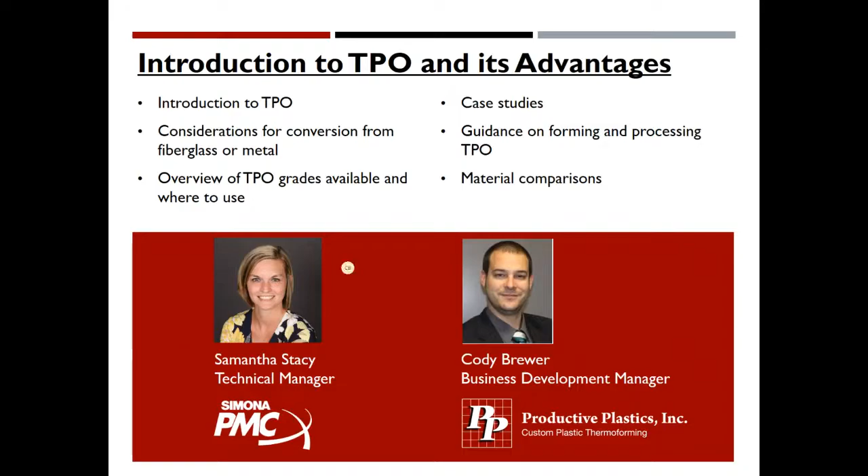So Productive Plastics, we are a heavy gauge plastic thermoformer. We were founded in 1955, so we're coming up on 70 years of operation. We do all vacuum forming and pressure forming, with in-house paint facilities. A lot of times when using pressure forming, we utilize textured molds to give a really good desired finished product.

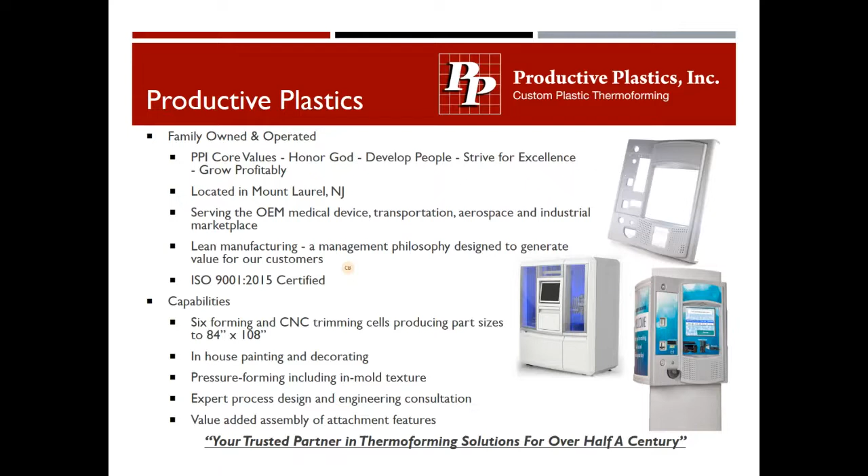Thanks, Cody. I'm Samantha Stacy, the technical manager at SIMONA PMC. I've been with the company since about 2015. I came in as a process engineer, spent some time as quality manager, and now I'm in charge of technical, so R&D, giving presentations like this, and helping our customers and OEMs pick out materials.

A little bit about SIMONA PMC, we're a custom sheet extruder based in Findlay, Ohio, about 45 minutes south of Toledo. We focus on the thermoforming market, so everything we make is a flat sheet that ends up being thermoformed into another part. We have very few pieces that stay flat.

We were previously a part of Romark, which some of you might be familiar with. We grew out of some excess capacity with Romark back in 2003, with heavy growth in 2016. Romark moved out and built a new building in the same industrial park as us, and we were acquired separately by SIMONA in 2018. It's been a good purchase for us.

We're among other sheet extruders, with 3 lines here in Findlay. They're all coex, so all multi-layer sheet extrusion, with capabilities up to 116 inches wide and up to 400 thousandths thick. The thinnest we go, which I'm getting asked about more and more, is about 033 on TPO. We have different capabilities like corona treatment and film lamination, plus a small R&D line for a lot of our innovation work, prototyping, and small sheet runs.

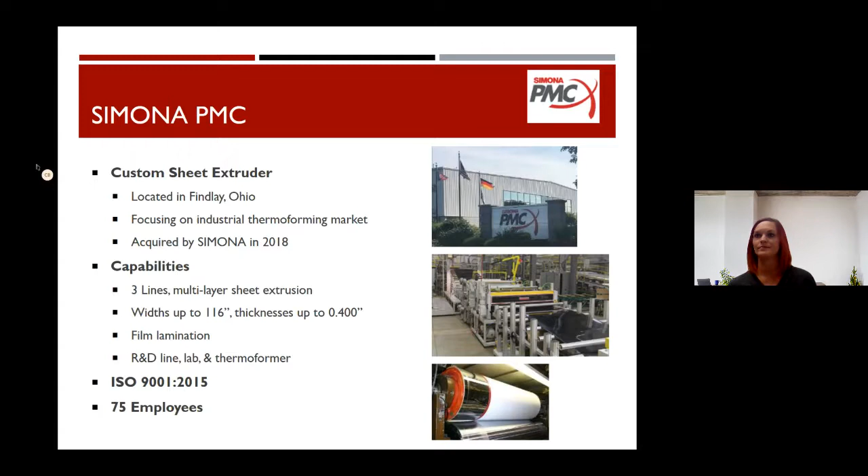Sorry. Cody, you might have to help me out. Thank you, sorry guys, it's my first webinar, so I am trying to figure it out still.

So why TPO? What is it? TPO is thermoplastic polyolefin, which is sort of a generic name. It's a blend of polypropylene and polyethylene. There's some elastomer in there for impact, and then some minerals, talc, and other additives for UV resistance, sometimes FR, and other properties.

It's processed a variety of ways - obviously extrusion, which is what we do here in Findlay, but it's also blow molded and injection molded depending on the grade. You see a lot of TPO in automotive, and a lot of that's injection molded. Most of your bumpers are TPO.

So why choose it? There are 4 reasons that we see TPO being chosen over other plastic materials, as well as over fiberglass or metal. The first, and one of the major selling points I think, is the cold temperature impact resistance - it's ductile down to -30. We see a lot of parts used outdoors in the winter being moved to TPO for that impact resistance; it's going to dent before it cracks. Other benefits include low thermal expansion, so parts that see a bunch of temperature swings, pretty good chemical resistance, and almost all of our grades are weatherable.

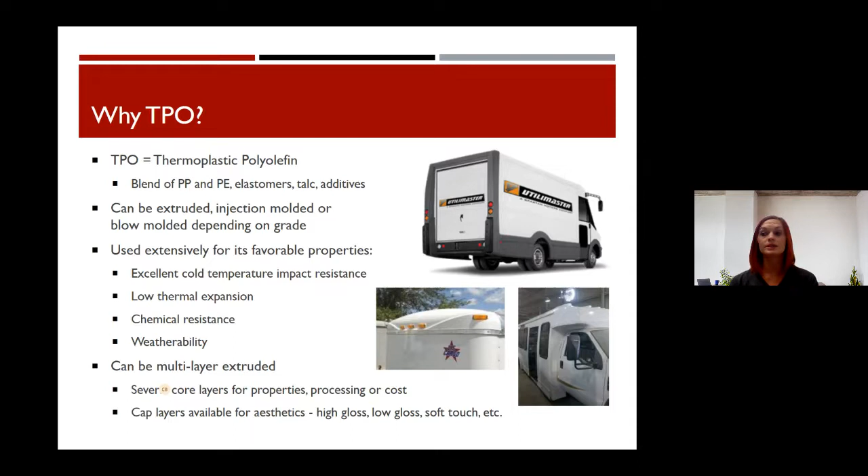So it holds up outside, inside, wherever it's being used. It can be multi-layer extruded. Like I said, all of our lines in Findlay are coex. So we see a lot of people choosing the core layers for properties, and then you add that cap layer.

So just kind of diving into some of those benefits. The first one, like I said, this is a major selling point for TPO, cold temperature impact.

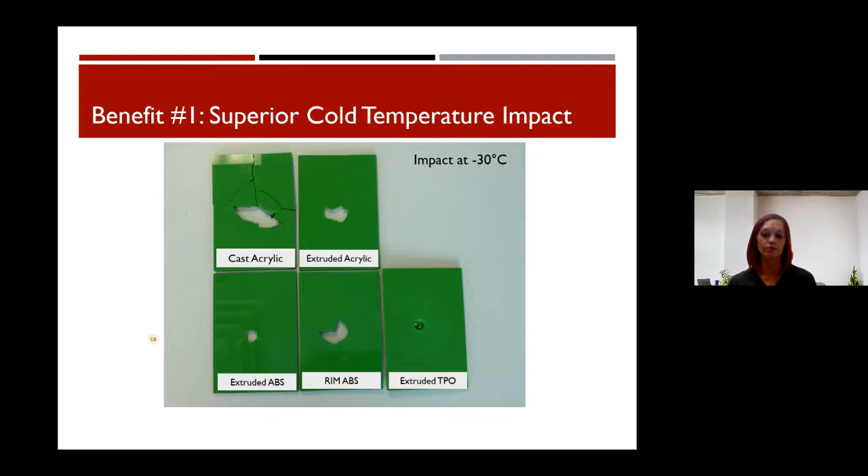You can see these samples. They were put down in a freezer at -30°C. You've got 2 different types of acrylic and then 2 different types of ABS compared to the TPO. You can see they've all cracked except for the TPO. It's definitely denting, but it's not full failure. So that's one of the major benefits.

The second one, which has been more popular lately, is the Low CLTE. This is one of the major benefits for it over an HDPE product. So CLTE, what is it? It's coefficient of linear thermal expansion. So how much the part in total is moving from -30°C to 80°C. So not just cold, but hot temperatures.

This is pretty important when you're looking at larger parts. Parts that have a long span, like you can see in the photo there, those bottom skirts for the U-Haul were moved to TPO because of what's happening in that top picture. They're warping in between the connection points. There's a ton of rivets down the side of that thing, and basically there's no room for the expansion and contraction of an HDPE. And so it's got to go somewhere, and it makes this bacon shape.

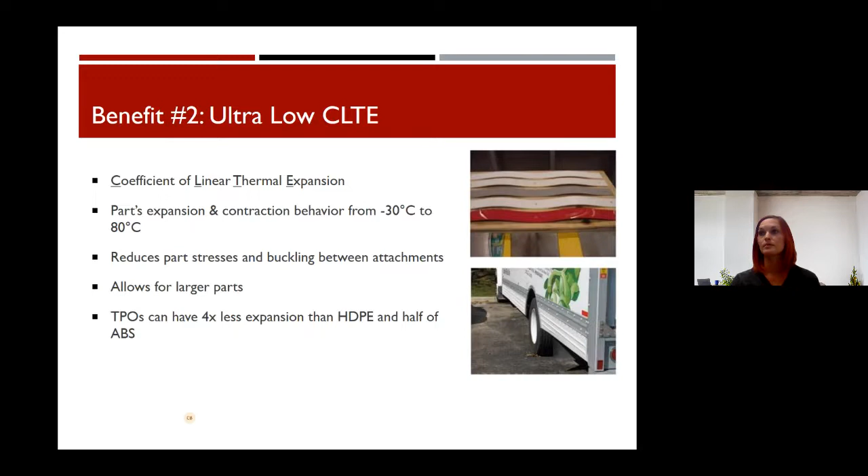So overall, TPO has 4 times less expansion than the high density polyethylene. So we see that a lot in flat panels or big kind of shoebox lid shapes. It has half that of ABS. So even if ABS is having a little bit of an issue, TPO is going to move less than that as well. And this is just some quick math.

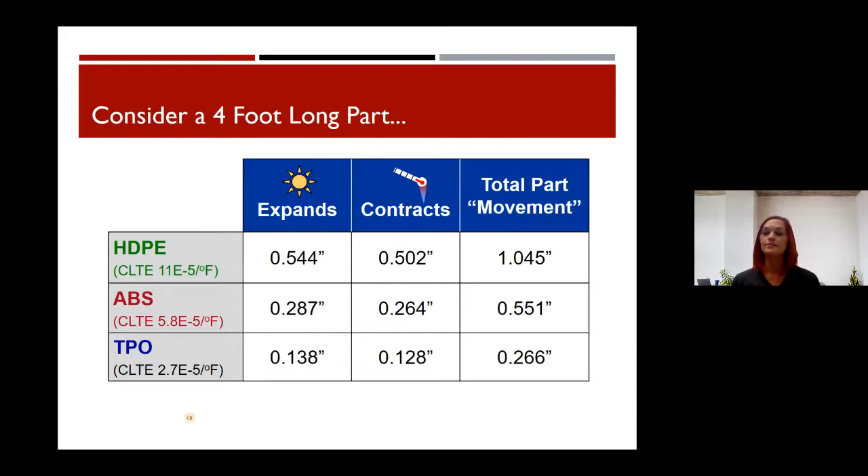If you have a 4-foot long, let's say, panel, and it's in HDPE, your total contraction is over 1/2 inch either direction. So you have to account for over 1 inch of movement total. With ABS, you have a little over 1/2 inch total, and then TPO is just a little bit over 1/4 of an inch. So that's pretty doable to account for.

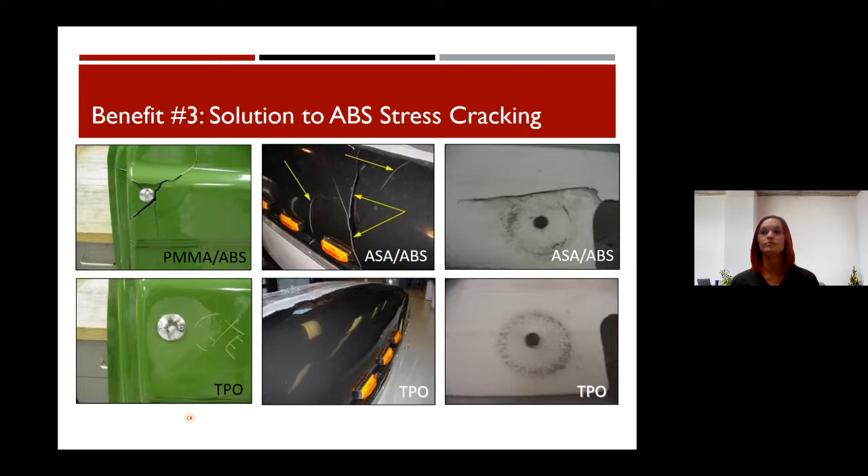This is kind of a lot on the slide, but basically really good chemical resistance. The only thing that's really going to bother TPO is something oily. Think a diesel, think a kerosene, something of that nature. And only if it's really soaked in it, it just makes that rubber content, the elastomer in there, swell up a little. Not really too much of a property issue, more of a discoloration type of issue. But for the most part, pretty good in chemical resistance.

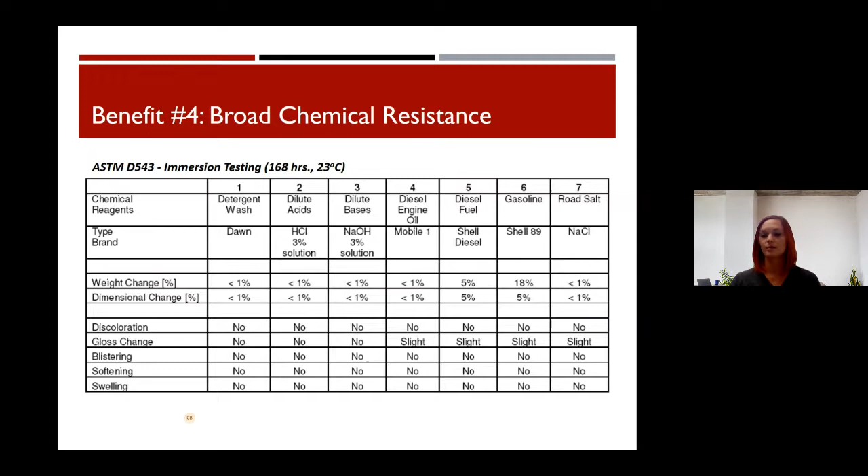Again, this is a lot to look at, but weatherability, almost all of our grades have weatherability already, they have UV in them. Even in bright colors, which are traditionally hard to weather, your reds, oranges, yellows, those always have a little bit of an issue weathering no matter how much UV is in them. TPO, particularly the high gloss caps, perform very well in those outdoor service environments.

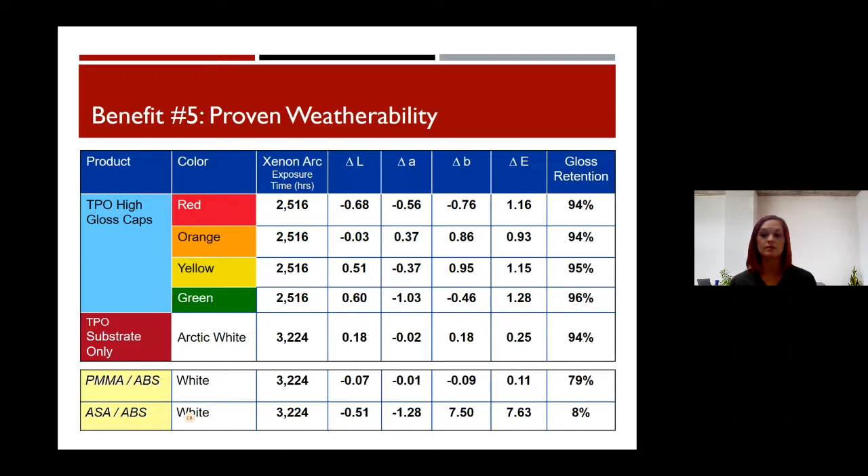Just a quick slide comparing it to a gel coat fiberglass. We looked at it in an orange color as well as a dark red. Typically, we use the automotive standards, indoor and outdoor SAE for accelerated weathering. Rule of thumb's about 1,000 hours is 1 year of South Florida exposure. We looked at the fiberglass against the high gloss TPOs, and you can see the fiberglass is good to a point. About 1,000 hours, you get a 4 delta E. In that bright of an orange, you're going to start to be able to visually see differences around 3 delta E. So it's good for about a year, but after that, it dramatically starts to fail.

You can see we did the same colors in orange and red in high gloss TPO, and they're still performing very well even after 2,000 hours, which is 2 years of South Florida exposure. And that's with water as well as heat.

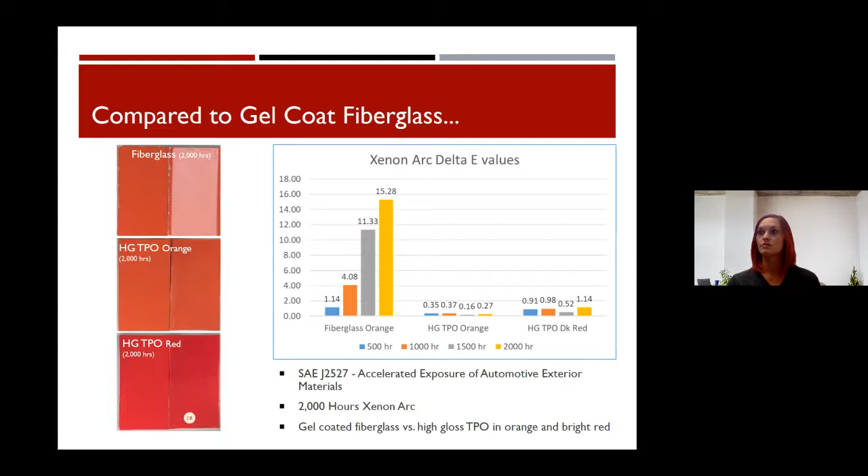On the why TPO question, one of the biggest topics I'm asked to talk about with our OEMs and thermoformers is conversion. A lot of people are looking at conversion out of fiberglass right now, just due to availability, but also out of metal. People who've never looked at this type of conversion before are more interested now than ever, so this slide came out of that popular topic.

One of the first things we talk about is lightweighting, especially with electric vehicles becoming popular. People are starting to look at how they can take weight out of the finished product, especially vehicles, also boats. A typical thermoformed TPO part is about 6 times lighter than metal, so it definitely wins there, and it's also about 30 to 40% lighter than the same part in fiberglass. That's been a big deal.

Fiberglass has always been a very labor-intensive process. You can make the same thermoform part with a lot less labor going into it. It's also an environmental control issue - anybody who's been to a fiberglass plant has smelled it a mile away. There's actually permitting required for that type of resin once you get to a certain amount. Not true with thermoplastics.

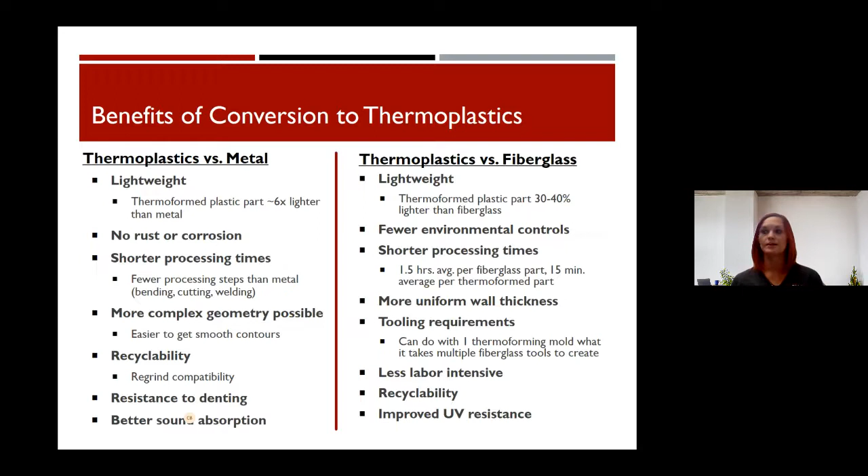And then recyclability - we get asked a lot what we're doing to recycle material and utilize recycled materials, which is kind of a funny question because we've always depended on recycled materials. There's about 20 to 30% recycled content usually coming back from the former to go into the sheet, which isn't necessarily true for fiberglass or metal.

This slide can be pretty quick - these are just some quick examples. A picture is worth 1,000 words, they say, so these are just some conversions to plastics from metal or fiberglass that we've seen in the past.

You can see that UPS truck, the gray pieces at the bottom. Again, that's a good example where TPO is a good option because it's a long flat panel, attached in multiple places along that truck, really to prevent it from warping.

The front bumper, that Mack bumper on the bottom left, that gray part is becoming TPO. We've also seen a lot of these trailer end caps, the white and black ones in the bottom right corner - again, that's for cracking, denting. Some of them were metal, they'd corrode, crack, and the paint would fade. Switching them to ABS or ASA type product solved some of it, but then you've got stress cracking, cold temperature cracking. Actually, I think that lower right one looks like it might have a little dent in it because it was metal - so a lot of those are moving to the high gloss TPOs.

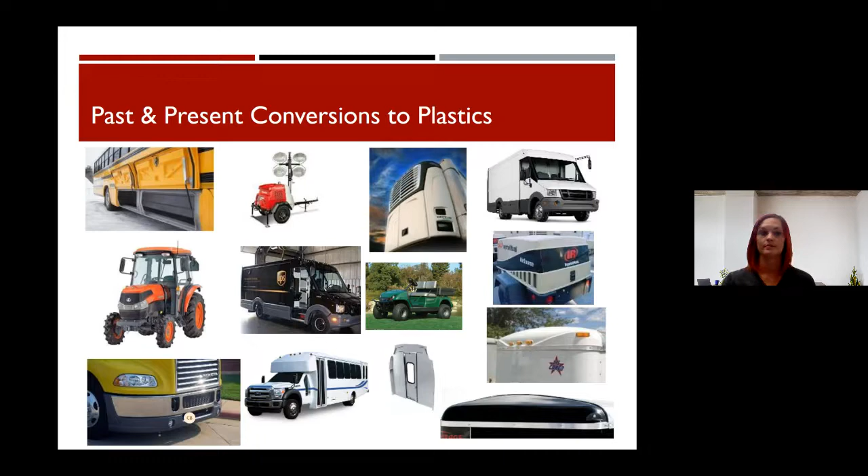So moving out of the why TPO and into what are your options. PMC extrudes 13 grades of TPO regularly, so we stock 13 core grades. We have access to many more, so you have a lot of options. It can be a little overwhelming, especially coming from metal or fiberglass and not knowing what the options are.

So how I usually present this, I like to think of it as a menu. Based on what properties you're looking for, here's all of our grades. Then as I learn more about the application, it allows me to remove some of these choices. It narrows the field down, so it's not quite so overwhelming.

So when we're talking about TPO, there's two main characteristics on the menu. Gloss is the big one. Do you want high gloss, low gloss, or don't you care? About half the options are high gloss, half are low gloss. We see a lot of low gloss in interiors, heavy truck likes low gloss, a lot of high gloss in exterior panels and parts, think vehicles, tractors. They want it to look glossy and shiny on the lot.

The other factor we think about is melt strength, which is kind of interesting. Melt strength is when TPO starts to sag in your thermoformer. You start to form this bag. It's not like ABS where it's slowly melting - once it starts to sag, it sags. So how well do you need that to hold together?

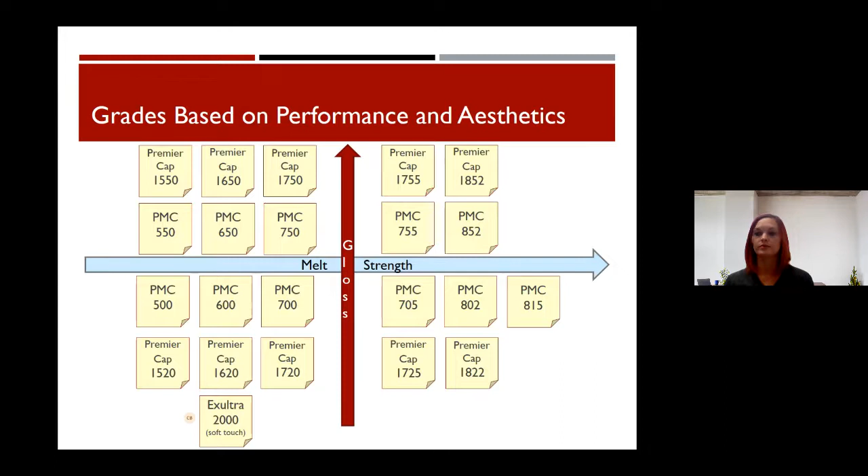Why is that important? It kind of depends on your tool. How deep is it, how complex? The more complex a part, you might need a little melt strength to help with that thermoforming. We can go all the way up to a high stiffness material if that's a concern. So we talk about aesthetics and how hard this part is going to be to form, how many features. Those are kind of how I see our world of TPOs.

So just starting off, the standard TPO series - 500, 600, and 700 series for PMC. 500 is our utility grade, it's got high regrind content. It's not going to have a lot of melt strength, but it's great for utility parts, for something simple, small. 600 and 700 series start to get into our standard and high melt strengths - that's that melt strength factor again.

Any of these can be textured, they can be smooth. We have a set of stock textures, and they can take a texture in a tool. We see them a lot as core grades as well, so they could be co-extruded. We can put a high gloss cap over it, a low gloss cap, whatever properties we're looking for - regrind compatible, so you can kind of see how the flex mod moves.

Your PMC 600 is standard, looking at around 275,000 PSI flex mod, HDT around 210. PMC 700 is probably one of the most popular grades - that's the high melt strength. You get a couple degrees on HDT, but you really gain about 25,000 PSI on flex mod.

And then PMC 705, we call it our ultra high melt strength product - 310,000 PSI on the flex mod. It's really for those parts that need a little more stiffness, a little more strength against sag, need to take a little bit more of a deep draw or some features.

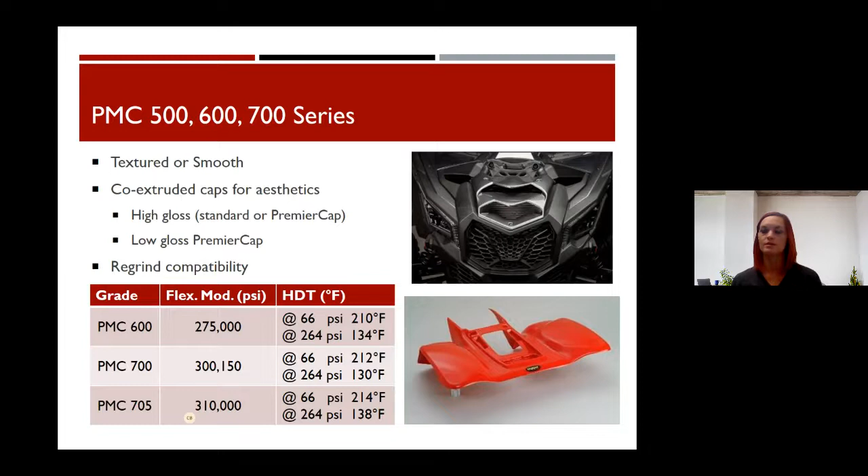Like I said, all of those can be extruded alone, or for properties we can extrude a cap over them. Our Premier cap line is relatively new. We obviously have a standard high gloss cap, but we developed the Premier cap - it's low, mid, or high gloss options.

It came about to address a field whitening phenomenon that was happening with TPOs. You can see that light tower, the green there - it looks like a weathering failure. It looks whitened from being outside, it's not the bright green anymore. It seemed to only be happening after thermoforming, and like I said, it looks like a weathering failure.

But we embarked on a long project to figure out what it was because it didn't make sense. We had UV in there, these things were weatherable, they were using color fast pigments. We learned a lot and found out the root cause wasn't really truly weathering. The properties were there - it was just a surface phenomenon that happened post-forming. It really was just on the surface where some of the mineral fillers were being locally enhanced, where there were just more of them.

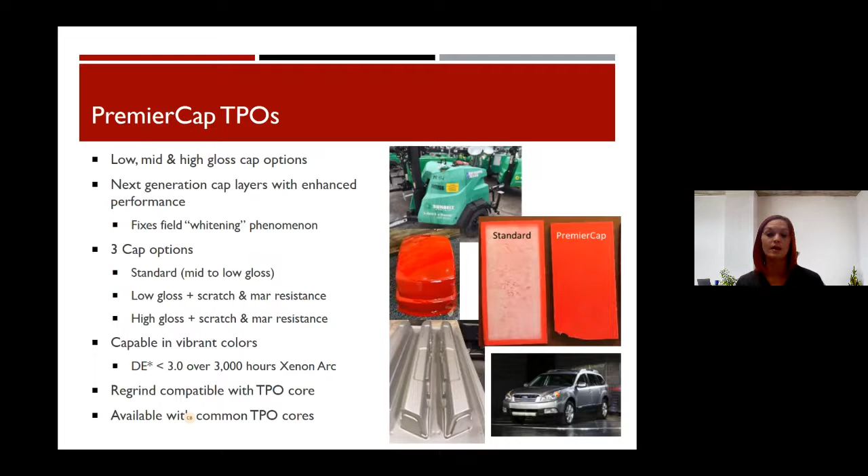So just some of the testing that we went through as we were working on the scratch and mar. Premier cap 1755, so it's the high gloss product. We have a small Gardner scratch. So when you think of scratch stylus, it's a stylus, so it's a point contact. Think your fingernail, I'm going to scratch something with my fingernail. Same kind of thing, just a little more controlled.

You can see off to the far left there is an acrylic. That's kind of the gold standard for scratch, as well as for mar. We tested the Premier Cap as well as standard high gloss TPO, and the Premier Cap performed nearly as good as the acrylic. So we were pretty happy with that.

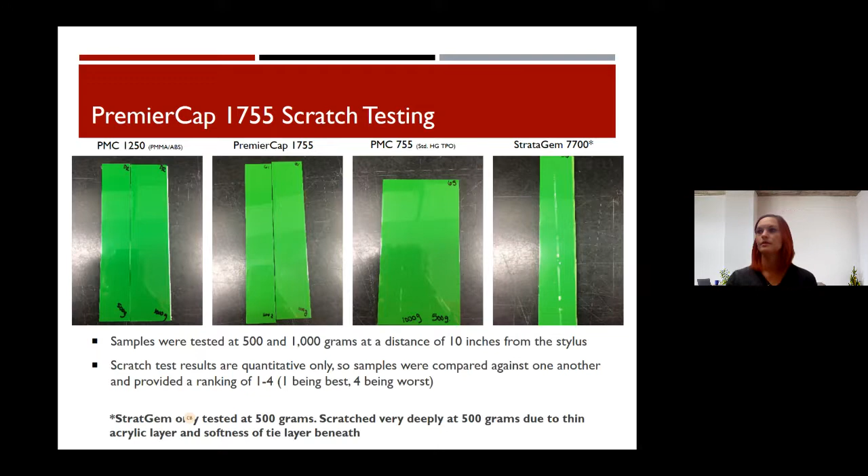Mar, it's basically more of a rub than a point. So it's a sort of an abrasion. And it's 5 strokes with a specific type of cloth, and you measure gloss before and after and compare.

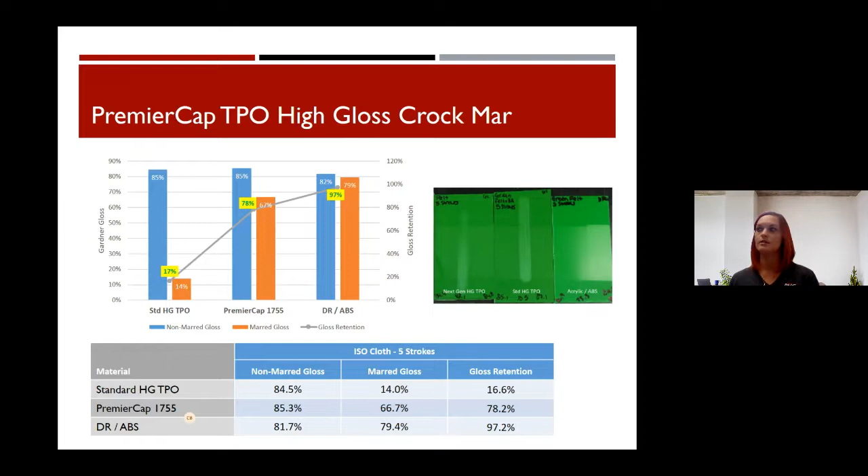So again, the acrylic is the gold standard for mar. You can barely see off to the right that it was ever even rubbed. The standard high gloss, there's a big white streak down the middle. It's pretty obvious, but you can see from the data that the Premier Cap performed very well. Still not quite up to acrylic, but significantly better as far as amount of gloss lost compared to standard high gloss.

So one of the major reasons a lot of people count TPO out is stiffness. Be it an arm on a console that's maybe a little too floppy feeling, or something that has to be close to a part that gets hot. We see people say, no, I don't want to talk about TPO for that because of that reason.

There are grades out there for that. They're becoming a little more popular now. We have two here at PMC. We have PMC 802, so that's a high mineral filled TPO. It takes your flex mod up to 570,000 PSI. Remember your high melt strength - the highest melt strength grade before getting into these high stiffness grades was 310,000 PSI.

It takes the HDT up to around 240. I've seen it be used near parts that get hotter just for shorter amounts of time. It's not like it's going to melt at 240, it just starts to deform. So we've been talking about that one a lot. The benefit with PMC 802 is aesthetics, so it can be used in parts you're going to have to look at.

It forms pretty well. PMC 815, if you need a little bit more heat, is the next level up. It's a glass filled TPO, short glass filled, and it gets your HDT up to 300 degrees. So we see a lot of fan shrouds in 815. It's close to some engine components, parts that get hot. It's also really stiff to the feel - 580,000 PSI on the flex mod.

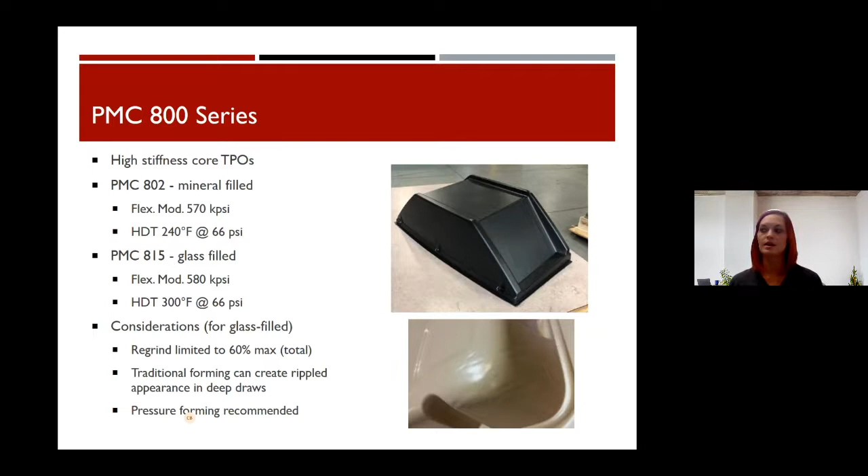So we, PMC, a lot of our innovation is focused on what our customers' feedback is on our current products and where we're missing the mark.

So the Premier Cap came out of the field whitening issue. Complaints about stiffness, we start to look at high stiffness grades. One of the major drawbacks of a TPO is that it's difficult to bond, difficult to paint. Low surface energy means nothing wants to stick to it. So coming out of that, our newest product line is Ontex.

It's our Ontex 8000 series, and it solved that problem. It's directly bondable, directly paintable. It's a film type of lamination process, and it allows for direct bonding and direct painting with no surface treatment. Actually, if you sand it, that would be negative because it removes that capability.

So you can use common adhesive. One of the major complaints - you can glue TPO, you can paint it, it just takes a lot of effort. You're putting a lot of surface treatment, there's primers, the adhesives are expensive. You could use regular ABS adhesives. We have people painting it. So there's none of that extra work.

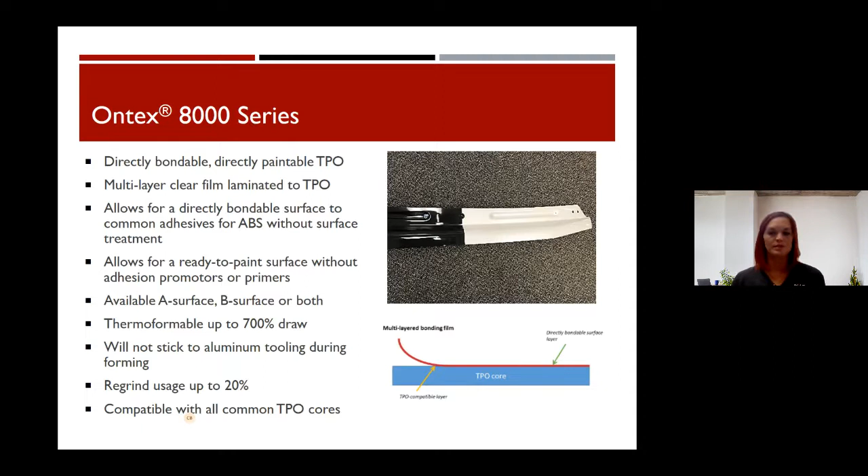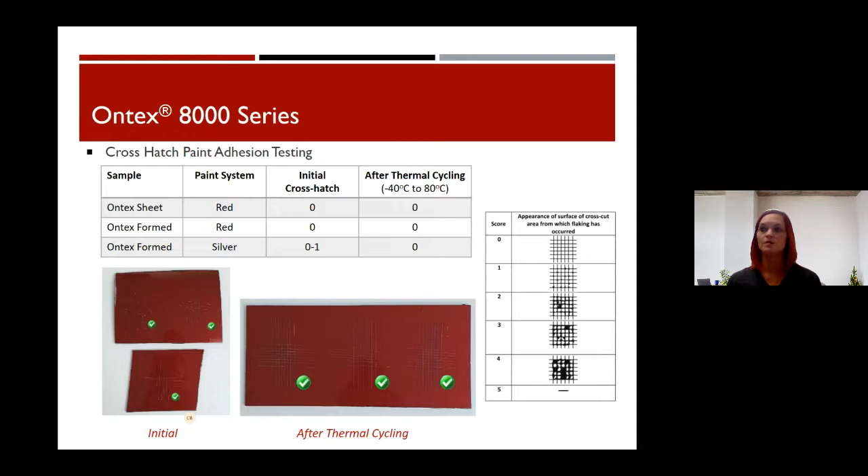We did do some testing, had some testing done with some outside suppliers just to make sure it was passing muster. One of the automotive grade tests for paint adhesion is this crosshatch test. We looked at red, we looked at a silver, and you can see even after thermal cycling fully from -40 to 80 C, it performed very, very well. So we got good adhesion on the paint. And then we also did a lap shear test for bond strength, where we made these little plaques. We bonded ABS as a control, as well as the TPO with Ontex.

We kind of took a poll of some of our main thermoforming customers and asked, what do you use to glue ABS? What do you use to glue ABS to things? And a popular one is the MA300 from Plexus. So that's what we used. You can see the Ontex performed just as well as the ABS, so we were very happy with that. Also, the standard TPO, you can see it didn't stick at all, which is what we would expect, but just to make sure, we tested those and everything looked pretty good from that point.

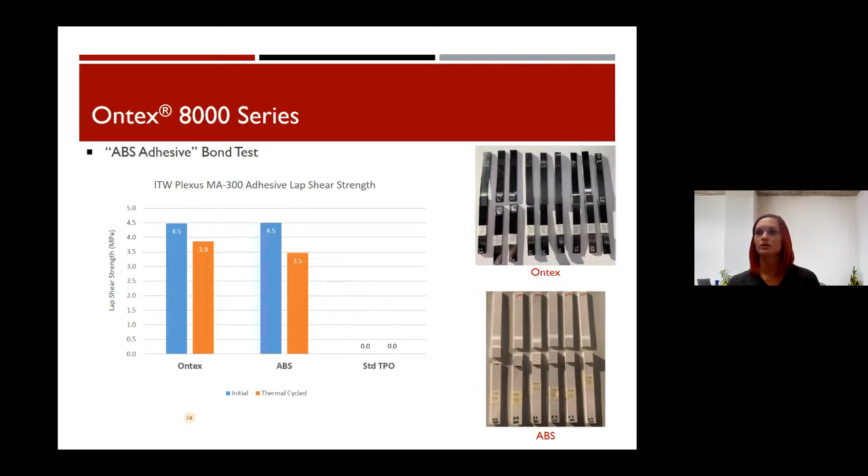So that's a nice option, especially when you're looking at multiple sheet systems or parts that need reinforcement - maybe there's some sort of attachment or something where you need it to be a little stiffer, so you need to reinforce on the backside. We see a lot of that, or just an easier way to paint.

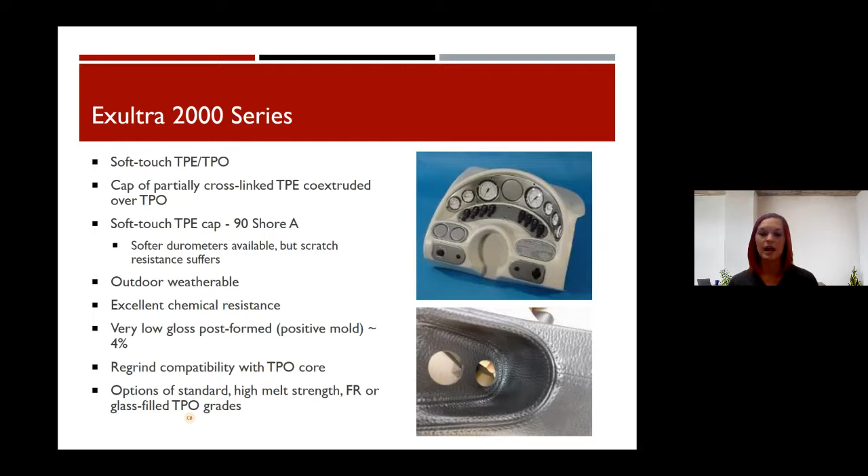So we put it over any of our core grades - the high melt strength, glass filled, high stiffness - you can have any of those core properties and then give it this soft touch feel. You can kind of see in the lower right, it also takes texture really well in a mold. So we do some smooth and some really light textures, so you can get that detailing, seams, or any kind of fixtures you want to add into that mold.

So thanks for sitting through my spiel for a little while. I'm gonna turn it over to Cody.

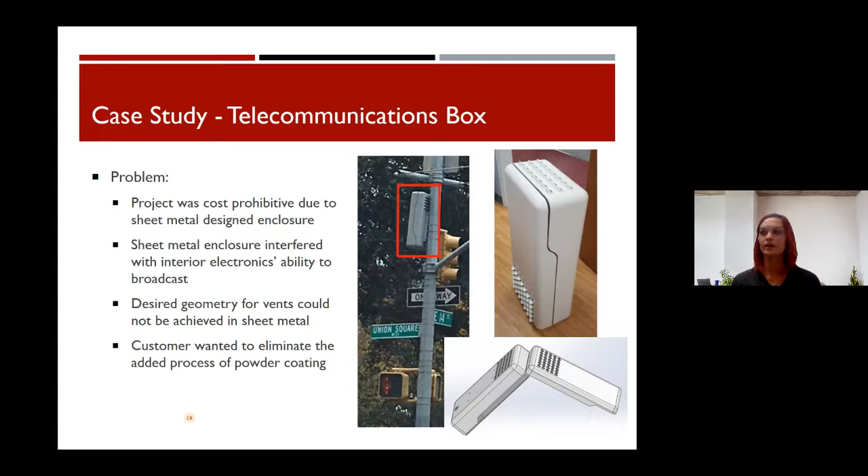They've got several case studies that they want to talk about where they've used TPO to solve some issues with other materials.

Sam, thank you so much. And don't worry, everybody, Sam will be back.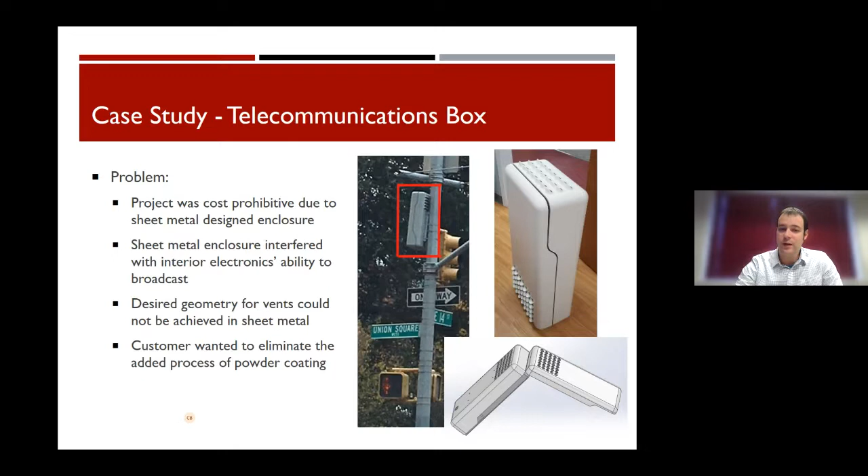So the TPO application that we worked through with them, we were able to help them with the design of the mold to get these vents in there. This mold, in addition to being a thermoform mold, has actuating components inside that, as the plastic would form over the mold, these actuated pieces would slide into place, creating the molded-in vents that they were looking for, without requiring any post-processing.

The molded-in color of the TPO allowed them to eliminate painting or powder coating from their process. And one of the biggest things for them was no longer being metal - the plastic didn't interfere with their electronic signals, and they were able to boost their signal significantly. Overall, this finalized TPO assembly, a multi-part assembly with a hinge on it, came in at roughly 30% of the price it would have cost them out of sheet metal.

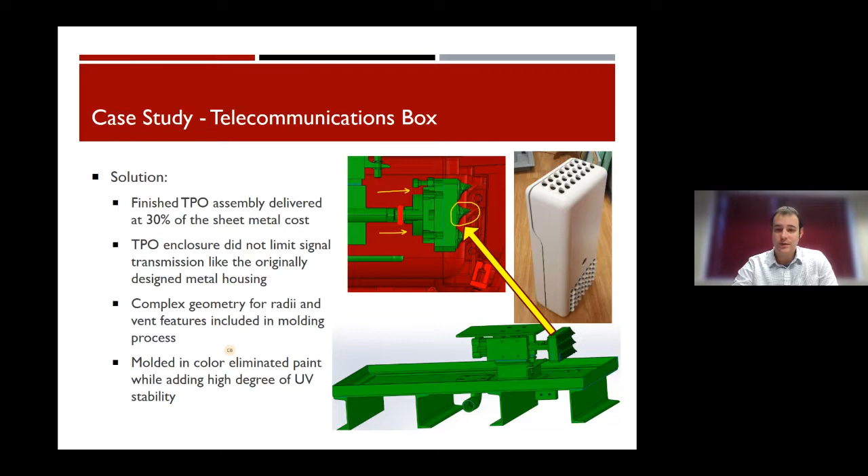So the next slide that we'll be looking at - here is another case study, and this one is working with a forklift manufacturer. We were producing a part for them, right behind the forks and in front of where the driver sits. There's a plastic panel, and that one was being made out of a PVC acrylic blend. They've been using it on this forklift for many years, and all of a sudden they gave a version of this forklift that was going to be used mainly inside cold storage and freezer units.

What they were finding is, as these forklifts were used inside freezers, when the temperature was getting really low, the PVC acrylic was very brittle. Imagine inside of a cold storage warehouse, someone knocks into a shelf and a 30-pound frozen turkey comes flying off a shelf. It was landing on these parts and shattering them.

So what we did was we were able to work with PMC and, using the same molds that they already had, transfer this over to a TPO material that, as Sam explained before, has excellent cold weather properties. It was able to reduce all the warranty claims that they were receiving from cracking on this particular part due to cold weather environments by around 80 to 85%. They reduced those warranty claims, so they were very happy with this transition over to the TPO.

One of the things that they were concerned with was that TPO might not meet the UL requirements that they had, but we worked with PMC to make sure we were using a proper grade of TPO that could meet the UL requirements.

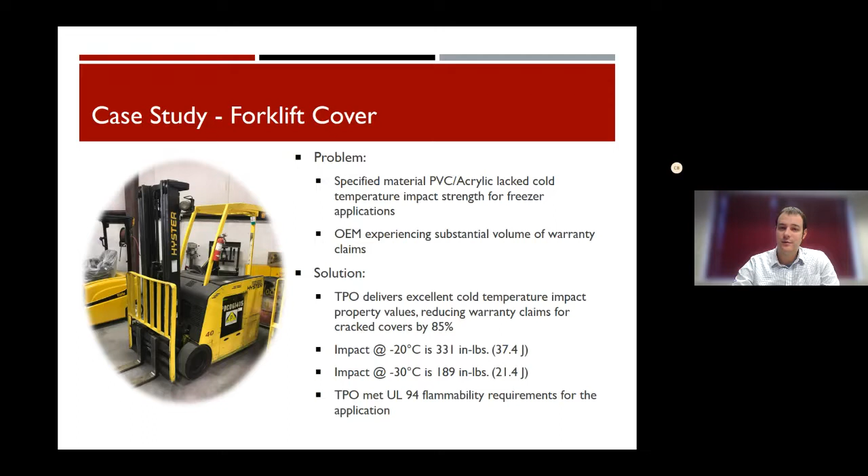So here's another application for TPO, another outdoor application like the telecommunications box was, and like that telecom box, the kind of complex geometry here was going to be very expensive to achieve in sheet metal. Just the amount of processing that the sheet metal takes was causing production delays. Sam mentioned a little bit on the process time of TPO versus something like fiberglass, but process time versus something like sheet metal is even smaller, because you're not requiring welding, grinding, sanding, anything like that.

In addition to the process time being long in a sheet metal application, what they were finding was that this cover also incorporated some commercially available injection molded parts. The small cover over the intake vents and output fans are injection molded pieces that were incorporated into this design. So what they were finding in sheet metal is they'd have to pop rivet those together, and actually the environmental seal was being compromised by those pop rivets.

So now the unit wasn't as sealed as it should have been, and they were getting some damage to the internal parts. So the TPO cover allowed for that excellent weatherability, UV protection, so they didn't have to worry about it in outdoor applications, cold weather environments. Even on snowy days, they didn't have to worry about this unit being broken.

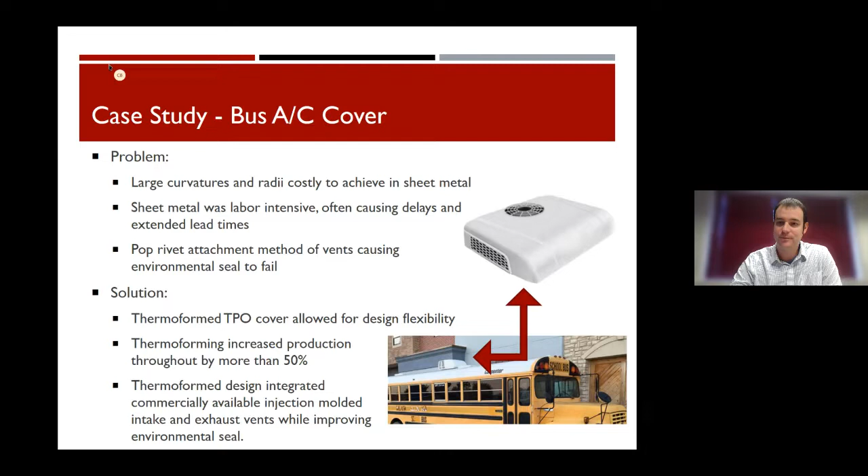Let's see. Oh, good, got it. All right, switching back and forth.

I'm new to that. So like Cody said, we've been working with TPO basically since the start of PMC, so 2003. Some of you probably worked with my current boss, Eric Short, so he was in on the ground floor of that. So we've learned a little bit along the way, and I'm sure some of you have learned a lot as well.

Just some quick tips and tricks with forming TPO. One thing, it's not a great selling point for it, is it's not as easy to form as ABS. TPO is semi-crystalline, ABS is amorphous, so they're different types of flow patterns. So what does that mean? ABS starts to melt, and the hotter it gets, the more it melts, but it's slow.

TPO, once it melts, it melts. So we say you're aiming for a core temperature range of 340 F, not surface, core temperature, and you only get 5 degrees either way. So it's not a large forming window. Some of the things that happen is, like you see in the picture on the right, your sag gets away from you. Once it starts to go, it's going. So you have to make sure it's being pulled out at the right time, at the right temperature. So it's a more precise melting point.

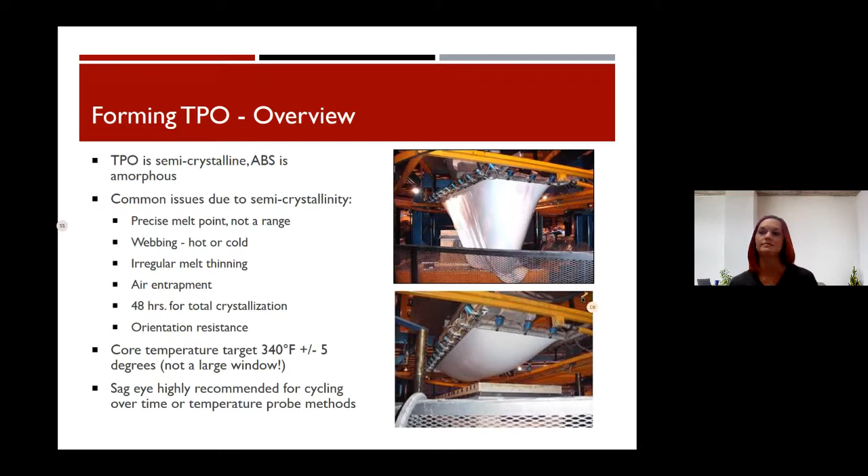We say quartz or ceramic for type of heater. We've seen cal-rod work, it's a little more effort. We've never really been able to use gas or gas catalytic and get good parts.

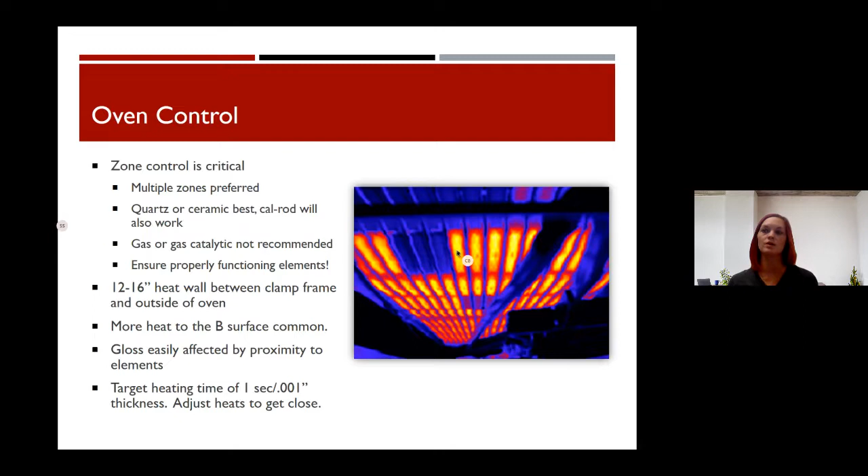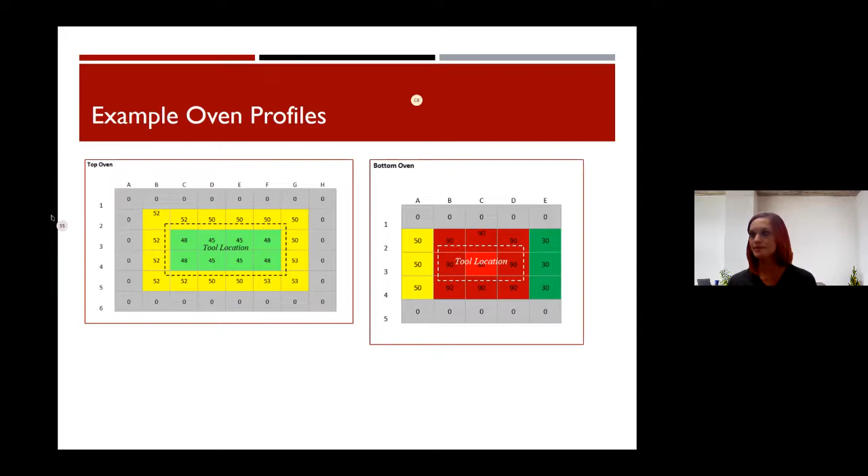On the tooling side, one of the first things we try to do if you've got a really complex part and you're having trouble, just flip it upside down, put the tool on the top. That allows it to kind of come down into a bubble.

When it starts to get really complex, maybe you've got a lot of dead space, some big features, a snapback method might be needed. It's basically you pull a draw box and you pull a big bubble first, and it results in a lot more even wall thickness because you're stretching it first and then vacuuming it onto that tool, sort of snaps it into the shape. So a lot less webbing that way, a lot more even wall thicknesses.

Again, temperature controlled aluminum. TPO takes 48 hours to fully cure. Cooling is key, just as heating is key. So being able to cool not just with fans from the outside, but evenly from the backside is a big benefit. Ceramic works too, it just holds a little more heat.

Epoxy, wood, or fiberglass, we see them very popular in prototyping and they work fine for that, but TPO is pretty sticky and it starts to eat at those tools and really tear them up. Trapped air is another concern, so smaller vacuum holes. Even at PMC, we can see the vacuum holes in some of our quality tools because they're just larger.

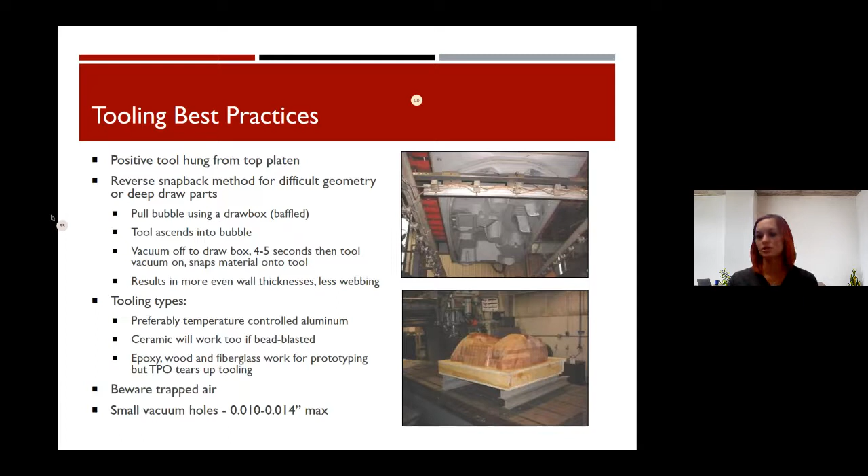Sealing is a big concern. TPO doesn't like to suck to the tool quite well. So you can see in that bottom right, they've got a small, what's called a moat, a little seal area, and they were having trouble with definition on the edges of the part. You need a little bit more of a box to seal it down to that tool, especially in those shoebox type of shapes or large open shapes.

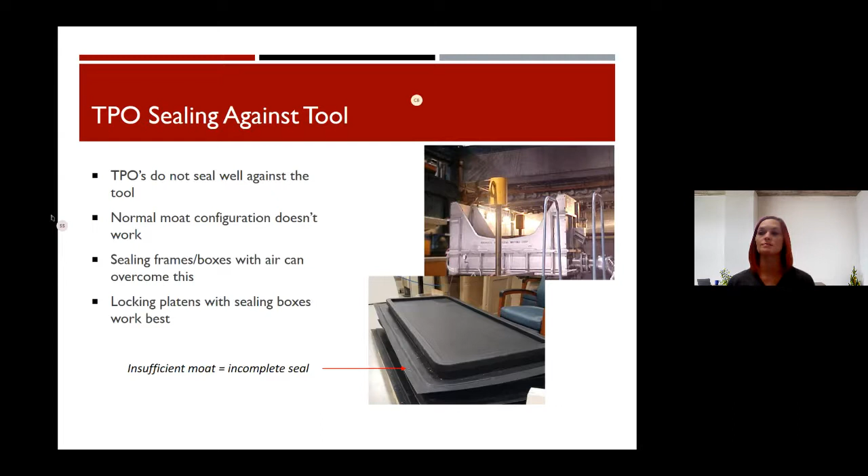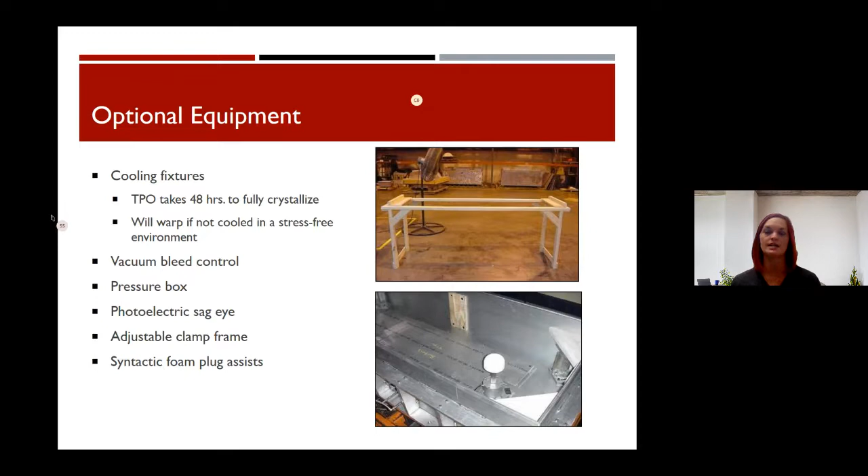Some optional equipment: cooling fixtures. Again, TPO takes 48 hours to crystallize. A lot of people use cooling fixtures to prevent warp and stress whitening. So if it's not cooling evenly, it's going to kind of move around, and it can do that for up to 48 hours. Vacuum bleed control on or off isn't necessarily as helpful as maybe needing a little less, a little more. And then just a sag eye, vertical's best, but bringing that sheet out of the oven at the right time saves a lot of scrap.

Cooling, we say 2 seconds per thousandth for cooling and 1 second per thousandth for heating. You can demold around 160, but it usually needs a little more even cooling past that. That's where those cooling fixtures allow air all around the part.

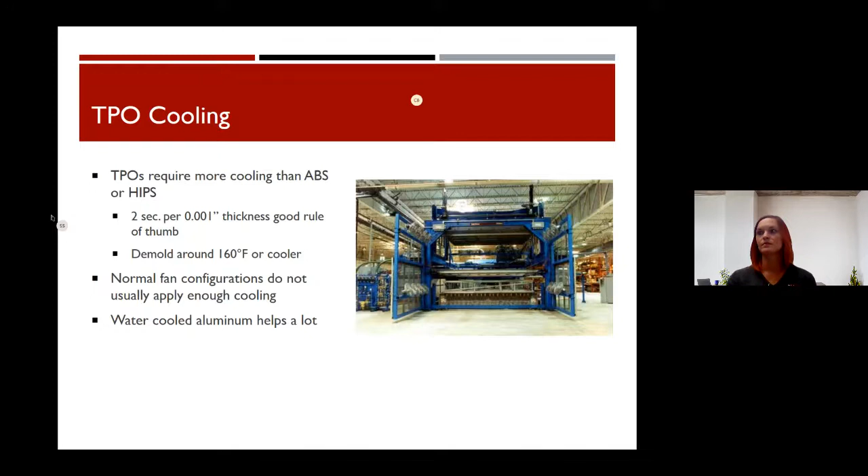We get asked a fair amount about bonding and trimming, double fluted taper bits. We see a lot of water jet used on the soft touch Exultra, but it kind of tears on the edge, so that's what we see there.

For bonding, like I said, TPO can be bonded. We see a lot of the structural adhesives from 3M, a little bit of Loctite with the polyolefin bonder. VHB tapes work really well, but all of those are relatively expensive. That's where Ontex comes into play - it's directly bondable, directly paintable without any of that. So that's also an option.

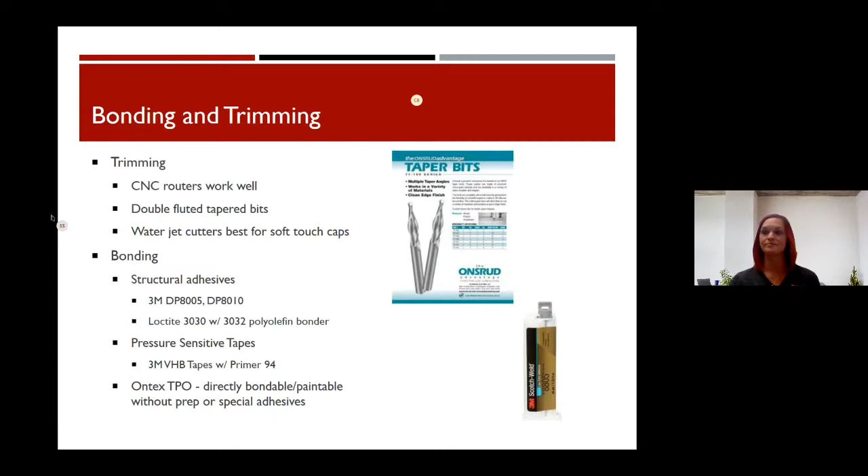Quick material comparisons, just general purpose. Against the high melt strength TPO, we chose our PMC 700 grade. It's a little more expensive than HDPE, but you don't have to deal with the CLTE shrink of HDPE. That's the main benefit.

Right now, with the market the way it is, medium impact ABS is in the same price range as TPO at this point. The main benefits over ABS would be weatherability - ABS is not naturally weatherable. CLTE is still higher with the ABS, and cold weather impact is a big deal.

Painted metal, we talked about multiple steps. Weight is a big one, corrosion, denting, and it can be a lot more expensive to run a paint booth.

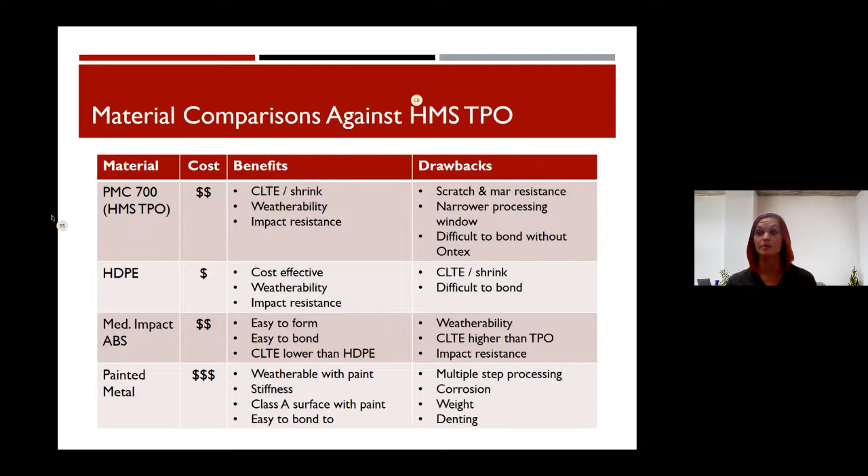On the high gloss side, PremierCap versus acrylic, same kind of benefits as over ABS. Painted metal and gel coat fiberglass are the other high gloss options we come up against. Fiberglass, yes, it's very stiff, it's a true high gloss Class A surface, but it's not as weatherable, very labor intensive, and weighs a lot.

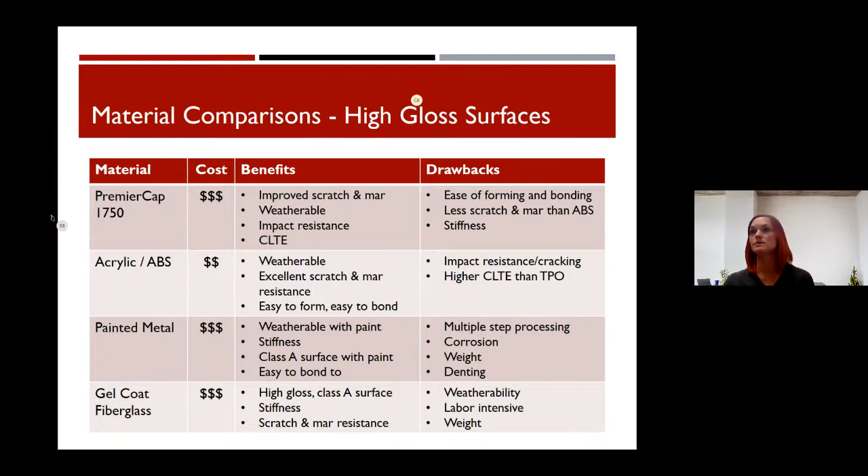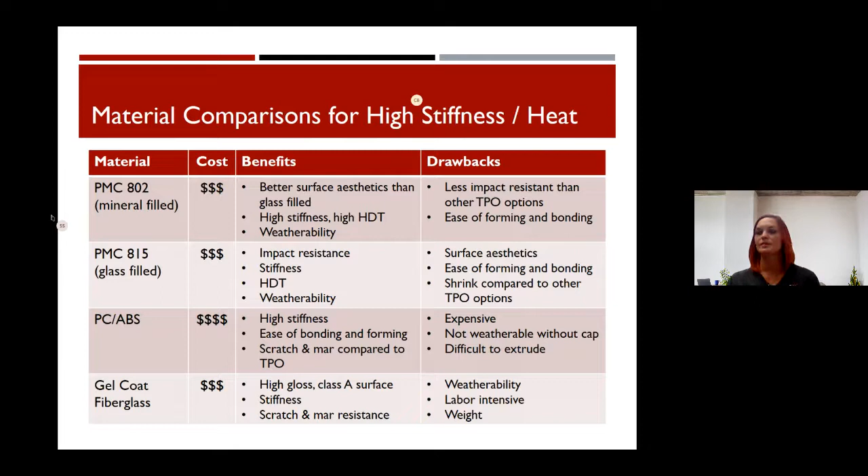Sorry, I kind of sped through those. I want to make sure you guys get time to ask questions and get out on time.